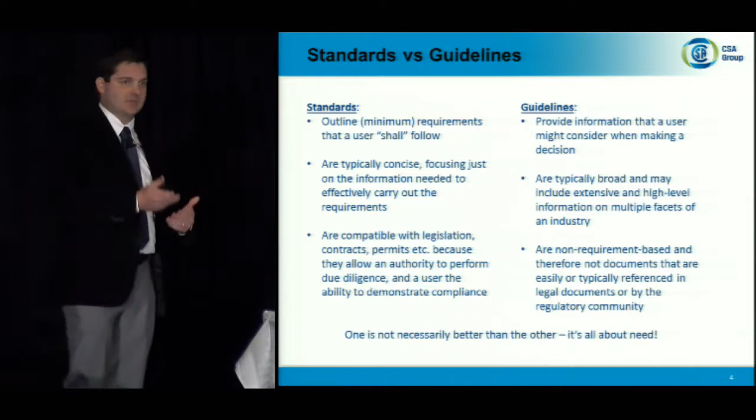And I just want to finish this slide by saying one is not necessarily better than the other. In fact, I think the CSA standard on inspection and monitoring will be very well complemented by the updated guideline that comes out for the Golden Horseshoe guidance document. So they can work hand in hand—one is not better than the other.

It's really driven by what is your need? What does the industry need? What is your objective with the document that you're developing? So keep that in mind.

So on to the inspection and monitoring standard. I'm guessing most of you can see this and read too, but I will rip through this real quick and then we'll get on to unpacking what this is really all talking about.

So the standard specifies minimum requirements to be adhered to with respect to the inspection of ESC measures through the duration of a project, as well as minimum requirements for monitoring and other water quality parameters for projects of varying complexity and sensitivity. It also includes a description of required qualifications for a qualified environmental inspector and a QEI in training. The standard further details the required documentation and communication procedures to be followed with respect to erosion and sediment control, inspection, monitoring, and other compliance.

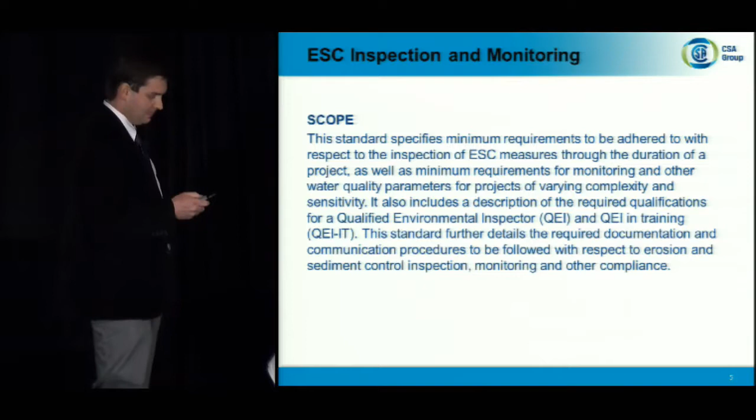So what does that all get broken down into? Generally speaking, the standard provides defined experience and education requirements for those considered qualified to go out, inspect, and monitor your ESC on your project sites. It provides minimum requirements for the inspection of ESC measures and plan implementation. I included this because it introduces the idea that you have a plan that you're going out and inspecting against, monitoring against, and that's an important point. It also provides minimum requirements for monitoring compliance with ESC plans, and finally, minimum requirements for documenting compliance with and the intended results of the erosion and sediment control plans.

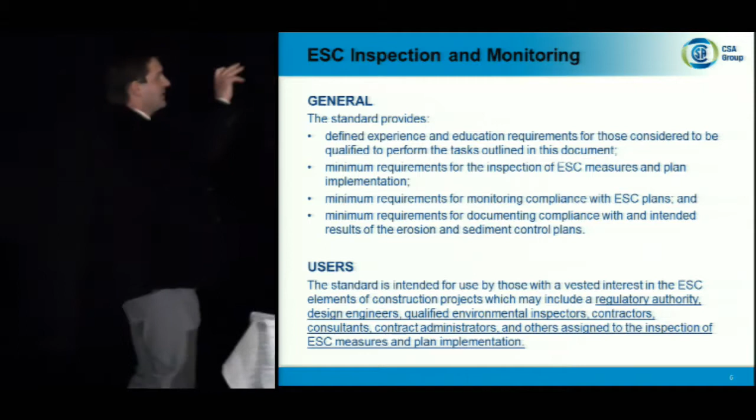Now, I went through the document and from start to finish pulled out some of the key pieces. The general section and the user sections are one of those. And I'll just say that moving forward, we're going to focus on the top three aspects mentioned in the general section: the inspection requirements, the monitoring requirements, and the requirements for qualified personnel to go out to your site.

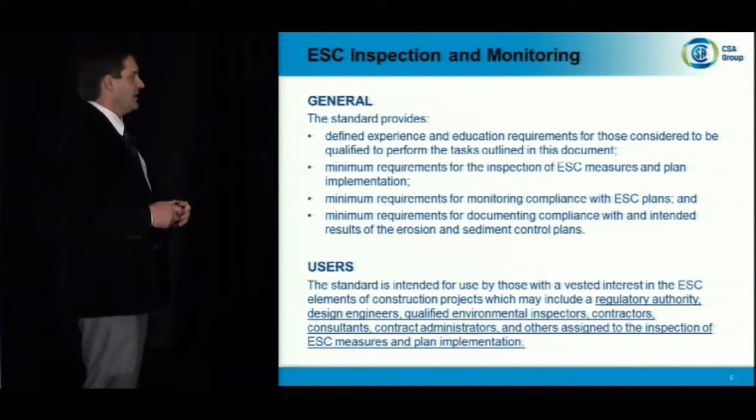So the users of the standard are intended to be regulators, design engineers, qualified environmental inspectors, contractors, consultants, contract administrators, and anybody else who has responsibility over going out, inspecting, and monitoring ESC in connection with your project site.

In terms of what the standard applies to, what projects and scenarios it applies to, they're listed here, and let me just preface this by saying this is what is currently in the standard. This is not ultimately what is representative of what might come out of the final standard. There is some discussion, particularly in the applicability section, that maybe we shouldn't confine it to just this list, but broaden it to all construction projects, provided, of course, that the inspection monitoring requirements give us the ability to do so. But for the time being, we're looking at buildings, roads, highways, other infrastructure, bridges and culverts, parking lots, pipelines, fiber optics, utilities, and modifications to any of these types of structures.

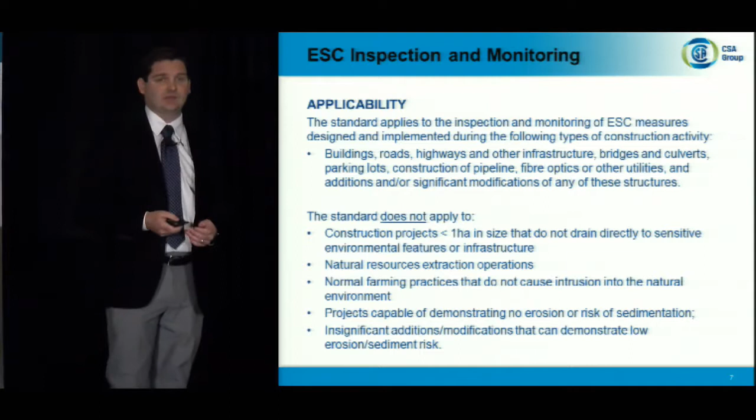What it does not apply to: construction projects less than a hectare, natural resource extraction operations, farming, projects that can demonstrate that ESC is a low risk for that site, or that erosion for that site is low risk. And then finally, insignificant additions or modifications that can demonstrate low risk.

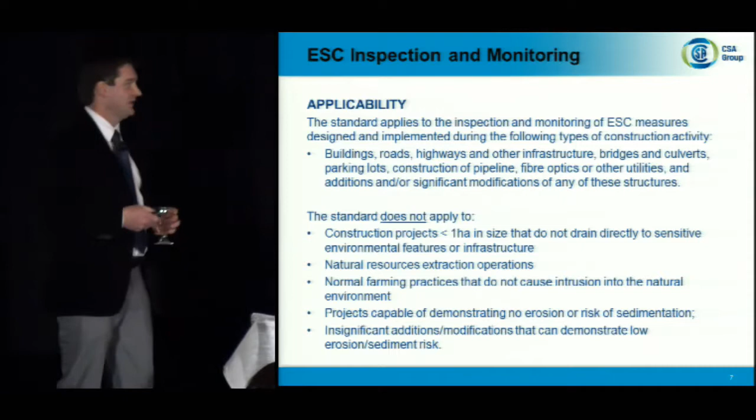So in these next couple of slides, I mentioned that I want to pick out three key aspects of the document, and we'll start with the qualified environmental inspector. On each of these slides, I've got a section below that tries to explain what the approach of the technical committee was, or what their goal was in developing each of these sections of the document.

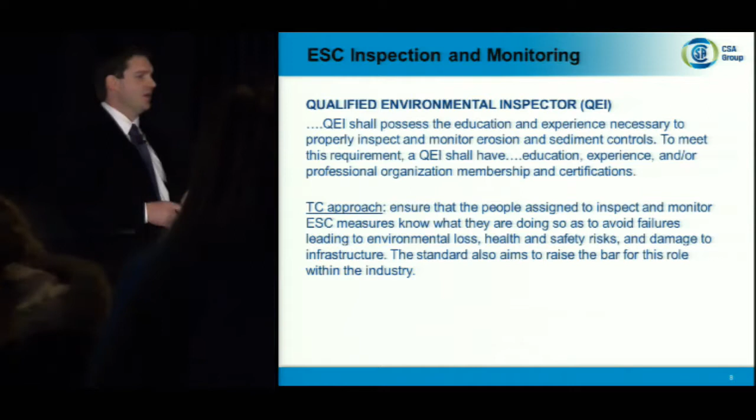So I've just extracted a little bit of the language from the document. A qualified environmental inspector shall possess the education and experience necessary to properly inspect and monitor erosion and sediment controls. To meet this requirement, a QEI shall have, and then the standard goes on to list a number of different requirements. These are education-based requirements, experience-based requirements, and there is some content in the standard that points to the use and application of membership in professional societies as well as certifications.

I can tell you, in the end, it will not mention specific certifications in any sort of requirement-based way, but it's pointing to the fact that certifications exist.

They can provide some experience and qualification to do this work, but they are being mentioned in a way that helps supplement or replace certain qualification requirements that the person may not have.

In all of this, the goal of the technical committee is to ensure that the person you're sending out to the project site is not some guy who just walked out of university or high school and doesn't know what he's looking for. He doesn't really know what to inspect, he's not familiar with common failures, he's not familiar with how to respond to water leaking off your site. He or she does not know what they're doing.

So we want to try to raise the bar for the people that we're sending out to the project sites, because this is where some of the inconsistencies, the project failures are taking place. Maybe the site wasn't designed properly, but this person is not going to know generally what to do. So let's raise the bar in terms of the qualifications. We want to make it flexible enough so that there are people out there who can qualify, but really focus on making sure that the people we are getting out there are qualified to do the work.

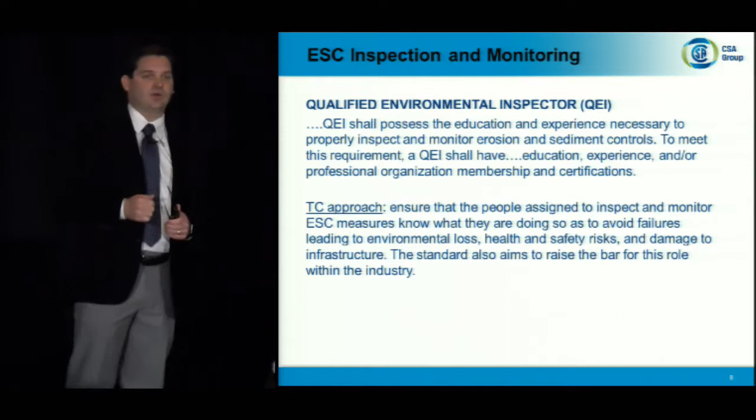So this is a really big part of the document. It was a really big goal from the outset to make sure the people we have there know what they're doing, and ultimately we are reducing our risk of environmental loss, human health and safety, and other problems with infrastructure.

The inspection section of the document covers pre-construction, during construction, and post-construction requirements, including actions to be taken, the frequency at which they should be taken, and other considerations relevant to making sure that erosion is effectively managed and sedimentation is avoided.

The approach here is to harmonize all of the best practices across Canada and across the industry in terms of inspecting ESC on a project site, so that you can raise the bar for how projects are being monitored and ultimately how successful they are. But we wanted to go out and find what are people doing that works.

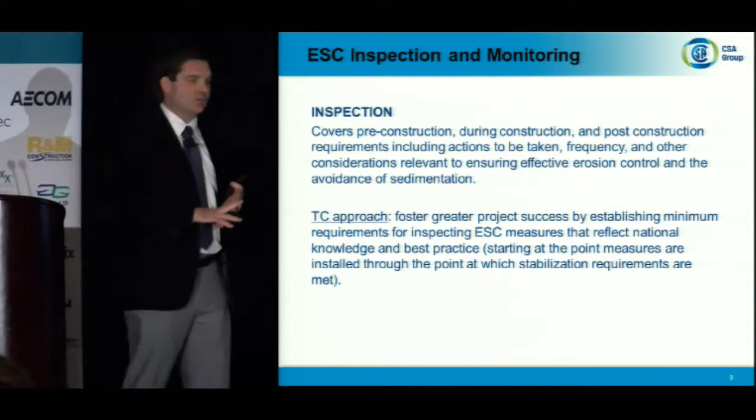Who are the people you're using? What are their qualifications? What are the practices that you're having them use when you go out and inspect? What are the things that you're looking for that ultimately reflect on a good, positive project outcome? That's been part of bringing in people from all over the country and from all different walks of the industry.

And the last point I've got here is an important point, and it's not just important for the inspection part of the document, it's important for the entire standard. When I talk more about the future standards, you'll start to piece together where this particular standard fits into the bigger package of standards that we're talking about.

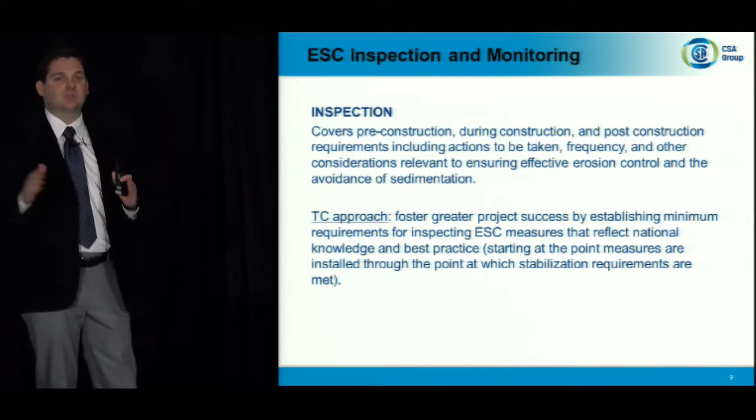But this standard is focused on the point at which ESC measures are being installed, so concurrently with the installation of ESC measures throughout the project, and it remains applicable through the point at which stabilization has been achieved. Probably should have had that point up front, but that's when I thought about putting it in there.

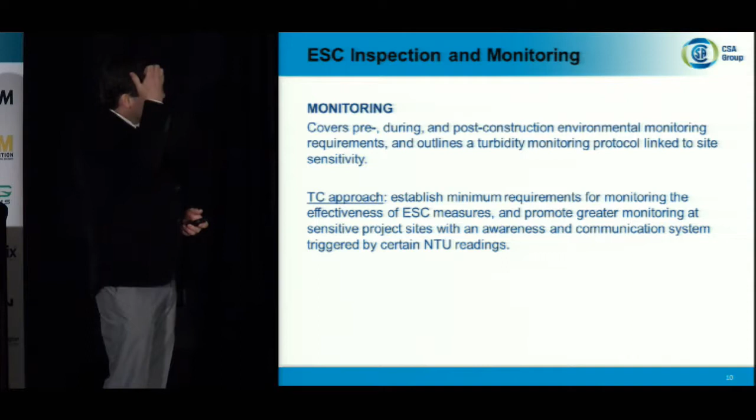Finally, the document takes a similar approach to monitoring in that it looks at minimum requirements for the pre-construction phase, during construction, and post-construction. When I say pre-construction, I'm talking about that period of time concurrently with the installation of ESC measures. We have also taken on the task of trying to develop a turbidity monitoring protocol that is linked to site sensitivity and risk.

And I can tell you that this has been a challenging exercise, and there are probably going to be some deviations to this approach over the coming month before the document goes out for public review.

But the notion that turbidity monitoring is a good thing, should be used more frequently, and as a way to really raise the profile for what a good ESC project is, is at the heart of the document. And so whatever modifications we do make, we're going to try to uphold that.

So finally, on the approach, I've reiterated it a number of times already, that we want to establish minimum requirements for monitoring effectiveness of ESC measures and promote greater monitoring at sensitive project sites. That's looking at turbidity monitoring, trying to get it on more projects, trying to get it done more frequently, do it better, and really pay attention to the sensitive project sites.

I think Paul probably covered that real well in his SiltSmart presentation, but we're kind of pulling from similar ideas there.

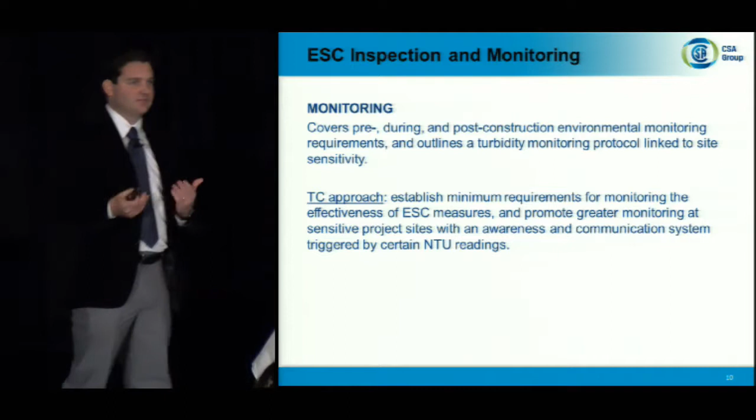Throughout the presentation I've mentioned there's talk of more than one standard, and there are going to be some questions people have when they read the inspection and monitoring standard. When those questions come up, think about these other two standards and what they're potentially going to cover. When we first set out on this project, we looked at doing three total standards, and because these are new in terms of being nationwide, we wanted to start with something manageable in terms of length and level of controversy.

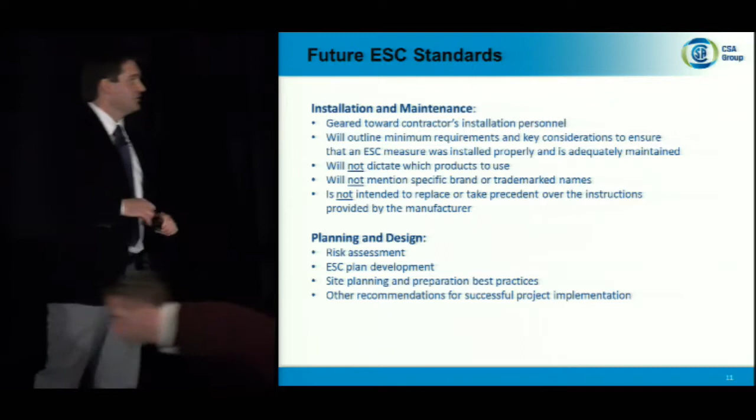It's a back-to-front approach, but we decided to start with the inspection and monitoring phase. Next, we're going to look at the installation and maintenance aspects of erosion and sediment control. So that is going to be looking at products, geared towards contractors and installation personnel, the people going out setting up these products and putting them in place. It's going to potentially outline minimum requirements and key considerations to ensure that ESC measures are installed properly and adequately maintained.

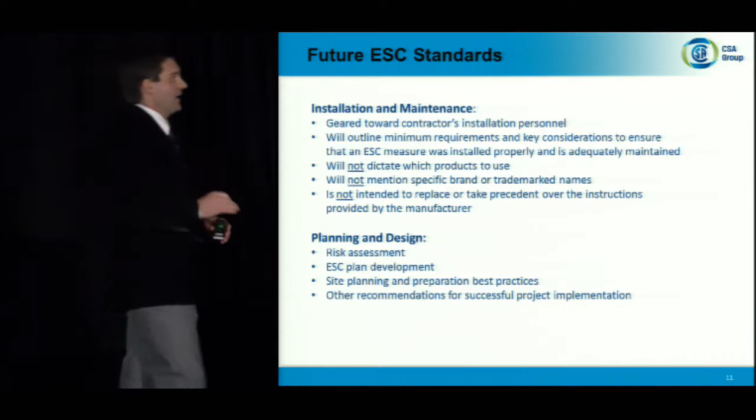And that's really the crux of the document, okay? Because it will not dictate which products to use, it will not mention specific brand or trademark names, and it's not intended to replace the instruction manual that comes with the products from the manufacturer. So again, it's looking at what are the important considerations, what are the scenarios, or what's going on at the site that I need to pay attention to. I can set up my Reno mattress, I can put these things together, no problem. But what are the other things that I need to know about?

We're at the early stage of fleshing this out, so this is a very brief, quick look at the types of things we're talking about. But stay tuned for more on that in the future. And then finally, the planning and design phase. This is going to be bigger, longer, more involved. I mean, you mentioned risk assessment, I think that kind of speaks for itself in terms of what we're going to take on there. But that's going to be an important piece to pulling all of this together so that you've got planning and design, installation and maintenance, and inspection and monitoring. You've basically got a nationwide set of standards for most, if not all, of the ESC industry.

So finally, ESC is a growing industry with new opportunities all the time. We have some inconsistencies, I think, and we can commonize the approaches or harmonize the best practices across the country. At least that's what we're trying to do, based in good knowledge and the experience of all of you, to help deal with those inconsistencies and increase the good practice and the good profile of the industry.